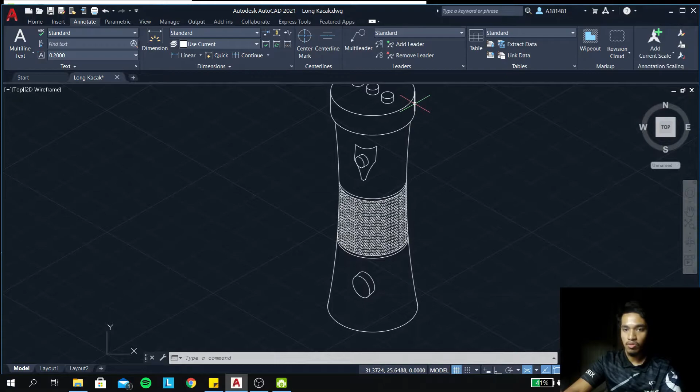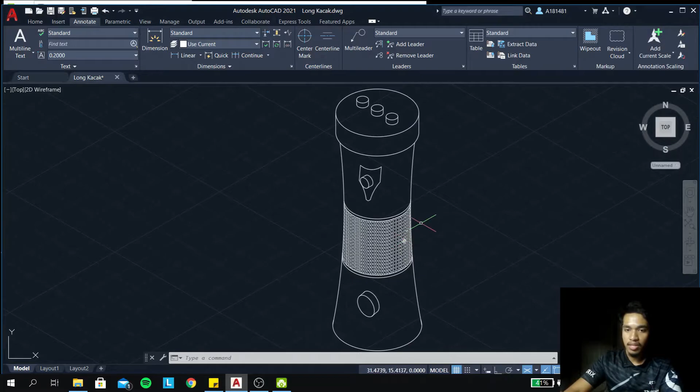For these circles, first of all, we just make a small circle, then we use array function to make a lot of circles. Then after that, we just trim it and it will become like this.

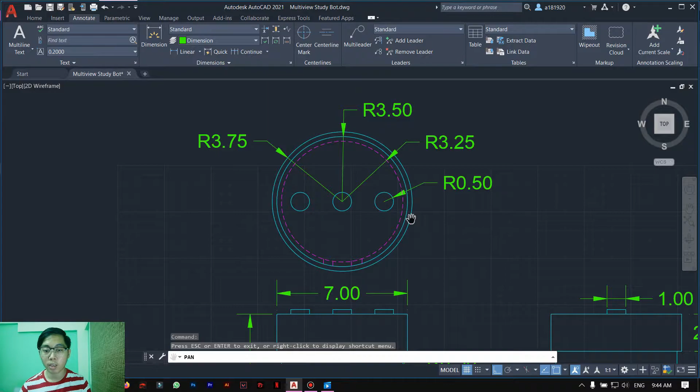This is the multi-view drawing for the StudyBot. In multi-view drawing, there are three parts, which are the top view, the front view, and the side view. Starting from the top view, since the StudyBot is in cylindrical shape, it is a circle. I also draw three buttons in circular shape, which are the power button and the volume buttons. Next, the front view.

From the front, we can see that this StudyBot is in rectangular shape. I divided the StudyBot into three parts. The top part is for the camera and the button. The middle part is for the speaker, and the bottom part is for the mode button and the charger port.

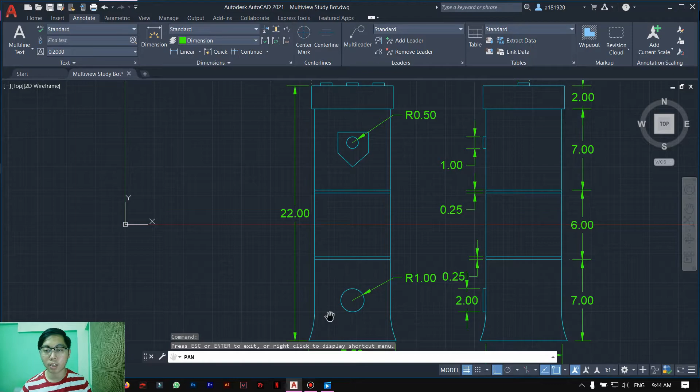Next is the side view. The side view is the same as the front view. From the side, we also can see that the StudyBot is rectangular in shape because the StudyBot is in a cylindrical shape.

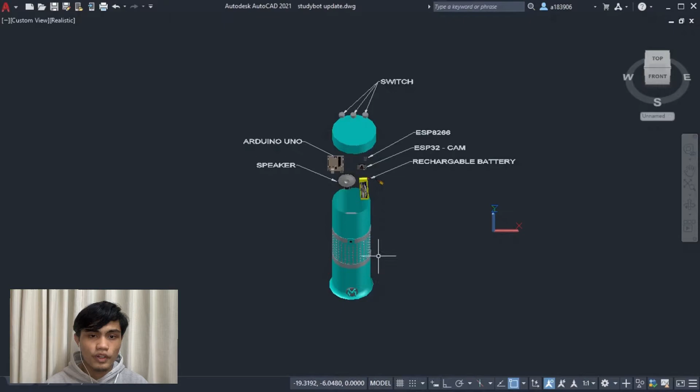So this is our product assembly drawing, and let's start from the outer component. Firstly, the body of our product is made of rigid polycarbonate that makes our product more durable and unbreakable. Next, the middle part where the sound will come out from, and the body of our camera part above it.

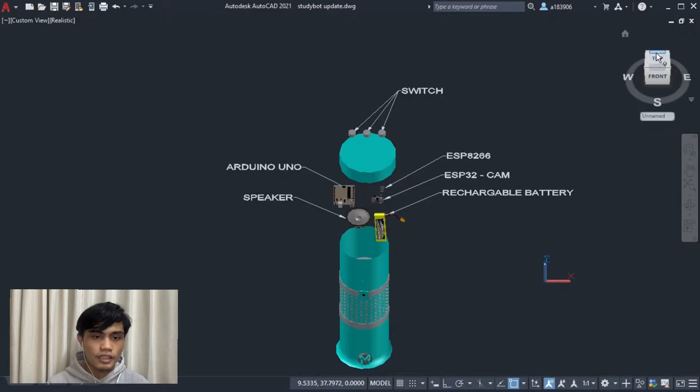So for the top of our product, we have 3 buttons that have different uses, and lastly we have the charger port at the back. Next, let's move on to the inner component. First of all, we have a rechargeable lithium polymer battery that is very lightweight and flexible.

Then the ESP32 cam that functions as a spy camera of our product that has an image recognition system to detect the user's activity. Next, we have ESP8266 that functions to connect our product wirelessly with a smartphone.

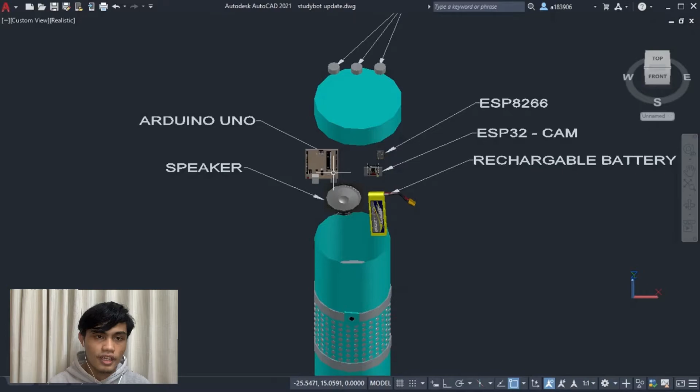After that, we get a woofer speaker that can produce powerful sound, and last but not least, the Arduino Uno that's very important to read the input and produce the output. In other words, to make our product function.